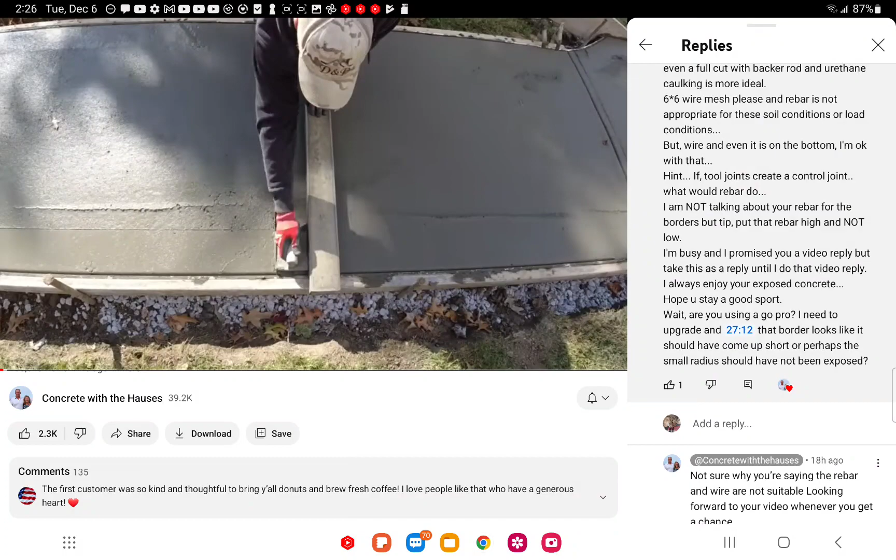Okay, guys, here's a guy out of up above Pittsburgh. We'll give a shout out to him. He says Concrete with the Hauses. All right, that's how he says his channel. He does some really nice stamped concrete borders; exposed concrete is what he really likes doing. I enjoy looking at his stamps and his work. I enjoy looking at the work.

All right, there's probably only one guy I probably don't enjoy much. The one out of up in Illinois or somewhere like that, with the big obese guy that just barely pulls up the wire and barely talks. That guy, that channel there, that work, I'd waste my time giving the advice I'm about to give to Concrete with the Hauses.

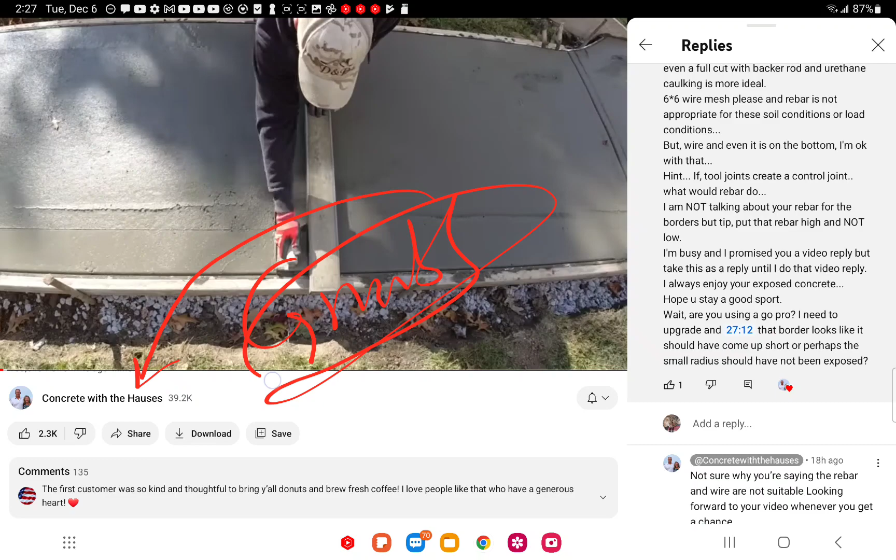Now this goes out to my man also out of Grub Mud. So Grub, this is you too. I said I would make something like this for you also. Well, I can do it for Hoss here also. Let's look at my comments and let's critique myself even. Okay, I wrote,

nice to see you using fiberglass. I saw him using fiberglass in this video. He scraped off some cream. I saw the fiberglass in it. He didn't say he was using it, I don't think. But I saw it. I would like to see those half-inch tool joints with perhaps a follow-up half-inch deep saw cut, meaning a total of 1 inch at least.

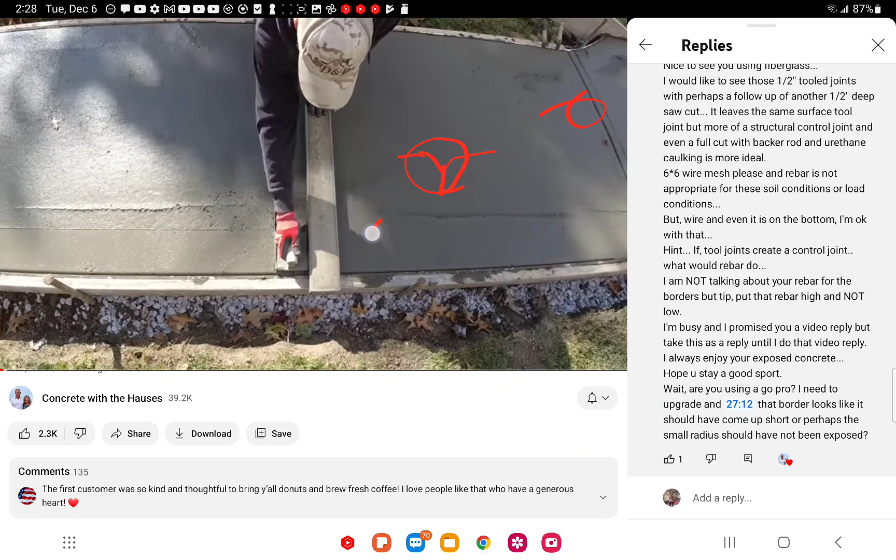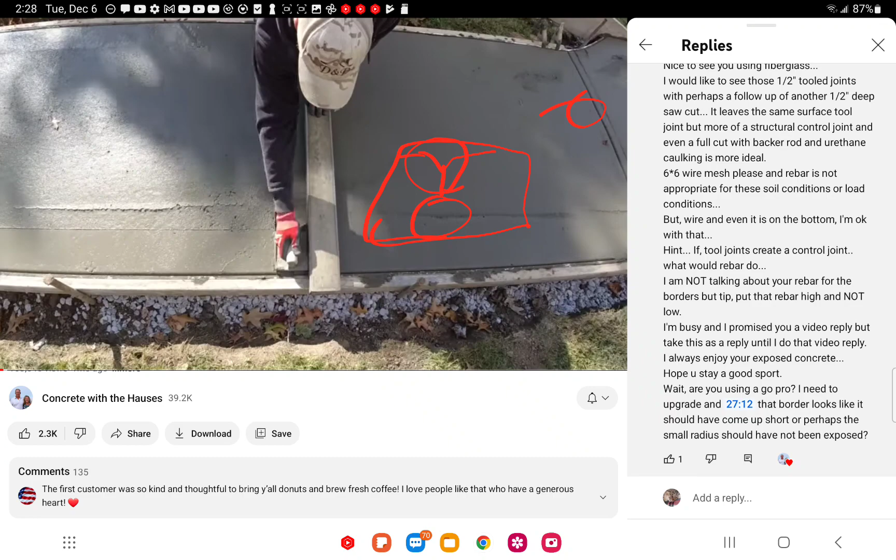So he's doing these joints. They look about a half-inch of profile. Okay. So after you set them, you come back and cut another half inch. And say you've got 3.5 inches here, which typically is not really 4. It's typically 3.5. That will leave dimensionally on the rest of the concrete. It's not as stable. More of the concrete over here, more stable than this dimensionally changed system there.

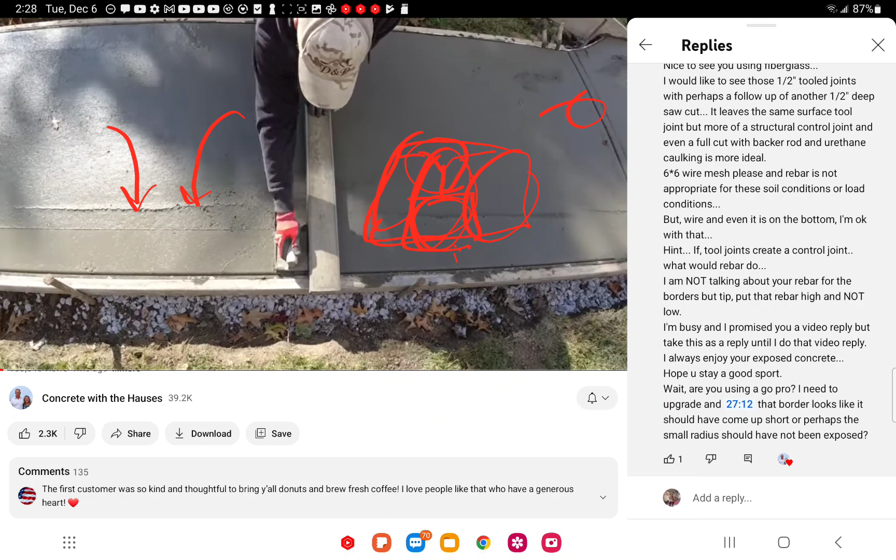That's more for loading. That's going to be for another video. It's not for expansion and contraction. A lot of people call it control joints, things like that. Not really. I'll explain that in future videos. And the short version is, you've still got butted concrete there. You have to put a full joint through, a full separation, for this to work. When I say full, you could argue back, well, I did 9/10. Yeah, well, you're right. That 1/10 really won't matter. All right, so it leaves some tooling.

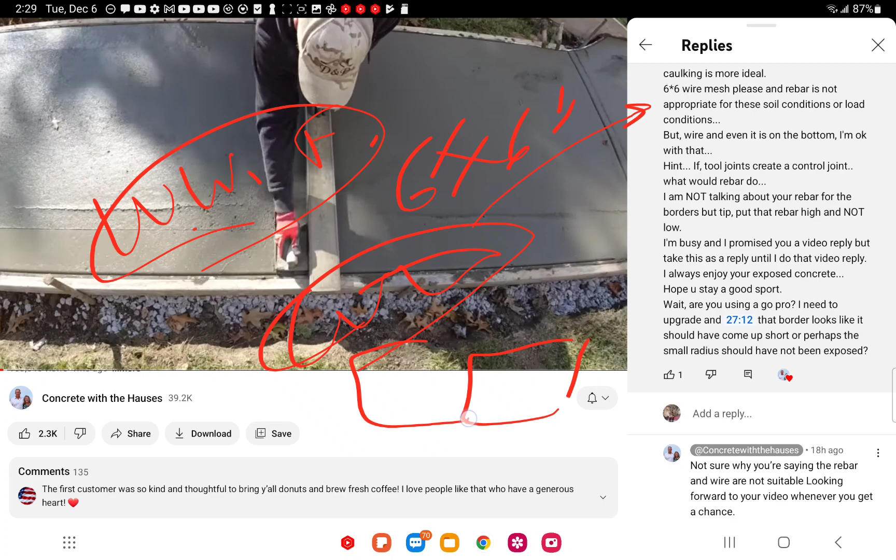Okay, let's look at my comments. Okay, so I state 6x6 wire mesh is what it's typically called. It's welded wire fabric, WWF. But typically contractors call it wire mesh. All right, 6x6 is one of the sizes, 6 inches by 6 inches. I'm going to show you that in a video in a moment, how awesome this product is.

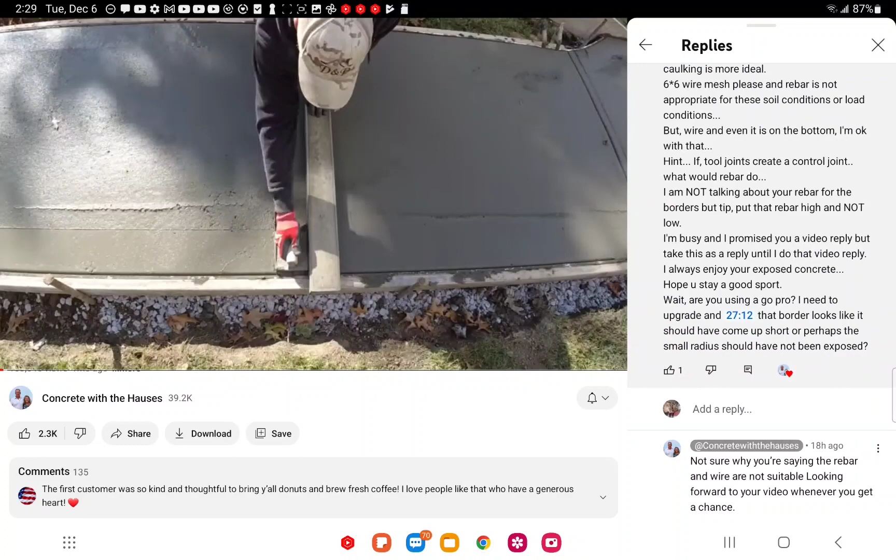Okay. Let's see. Hint: if tool joints create a control joint, what would rebar do? So in other words, if this tooling joint here creates a control joint, well, what happens when you have concrete here and you put rebar in it? What is that creating? It's an internal control joint also that you're creating with these voids, but you're filling the voids with steel. But then it needs bond strength, right?

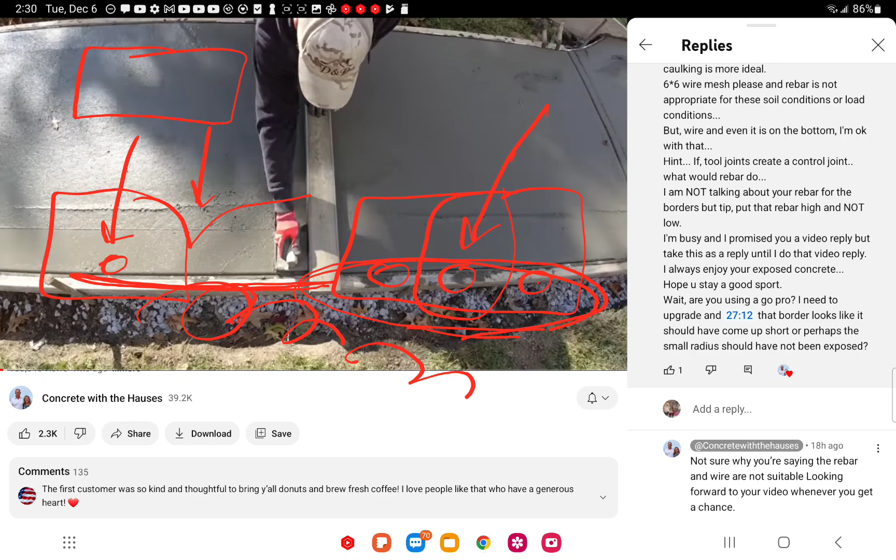So you're changing the behavior of the concrete, and the steel will not be one and the same. Concrete over here is one and the same. When you put the wire in it, it's going to be different behavior. And when you put rebar in, a different behavior. This is so small. These 3.5 inch pads, it's overkill using the reinforcement. And a lot of times I see contractors, and I think, Hoss, you might be one, put the reinforcement going this way.

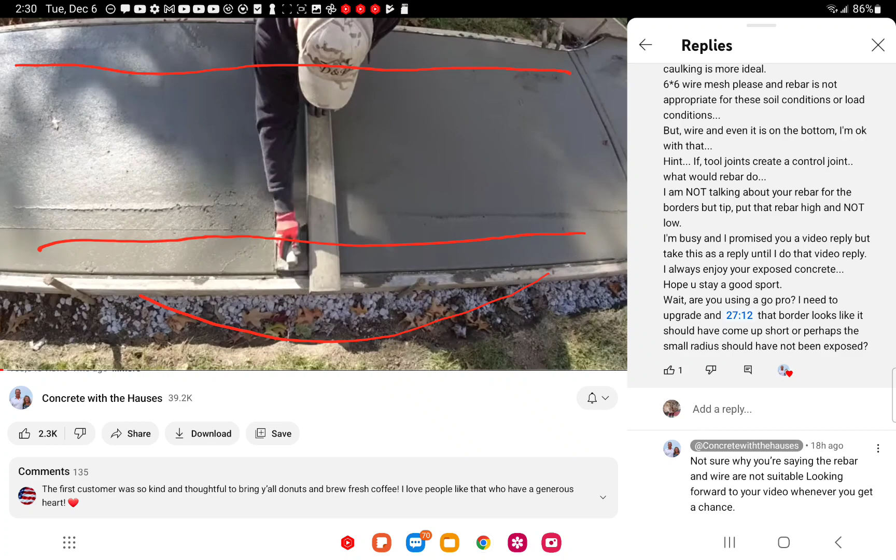So yeah, think of rebar. It's a longer reply video, and I don't want to go down that line, but think of it like a beam at that point. So you've just created a beam on the edge, but only with loading coming in this direction or this direction. You didn't do anything for the center here. It does not do anything of value.

Okay, so why? Okay, I'm busy. I promised you a video. I said that before to him, so now I'm getting to it. I always enjoy your exposed concrete. Hope you stay a good sport, meaning me doing these type of videos on my comments. Wait, are you using GoPro? That's what I want to know about that. I didn't answer it because it sounds really good. Not sure why you're saying the rebar and wire are not suitable.

Looking forward to your video whenever you get a chance.

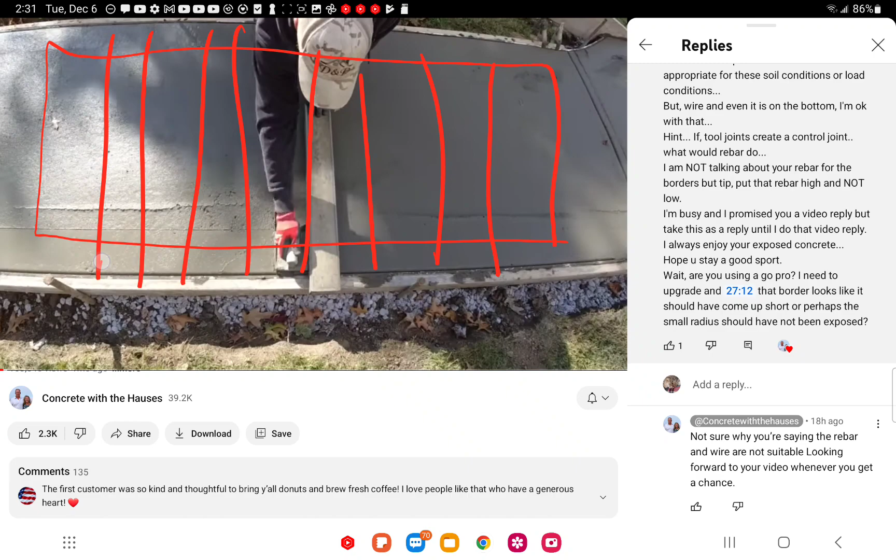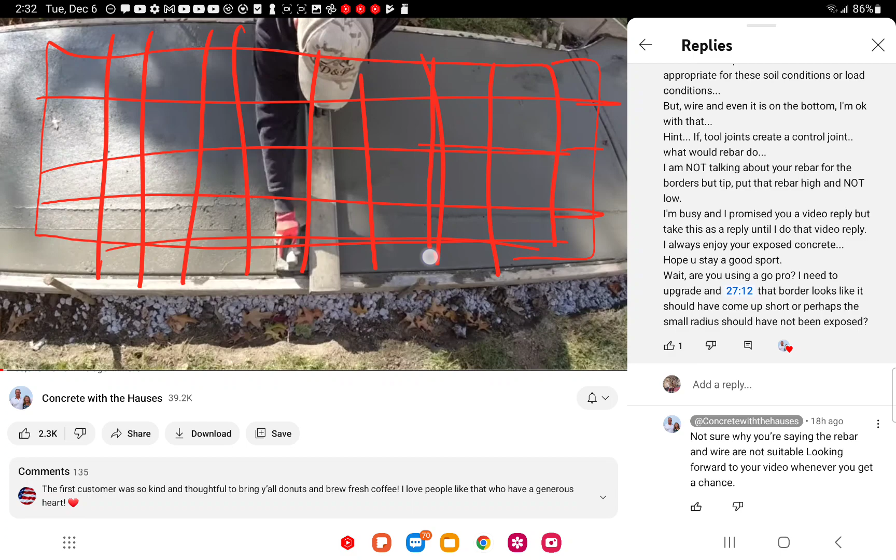So the rebar, just wire mesh. All right. So I want you to see this wire mesh. All right, Grub Mud, I want you to see this too. Okay. So I'm going to show you another video I made on this, but I want you to visualize that. Now this is working two directions. This is two-directional reinforcement for loading any direction.

I like Columbo moves. I like giving hints, but let's do this, and I'll go to that video too.

This is just a wall holding a slab sticking out. There's nothing here, this is just air. Okay, air. All right, and here's a reinforcement at the top. If I were to push down on this end here, load here, you can see it would elongate here. Okay. Now let's put the rebar at the bottom. Let's put the load here. You can see that this would break free here, and allow flexing to go down.

So Haas, when you're doing the borders, and frankly, where your cars are, your borders. Dropping something, sorry. You want to think of that loading, and Grub, this is what I was going to tell you, for you and for everyone. Put it top and bottom, but top or at the edge.

All right. So let's look at this profile. So let's look at the concrete, and this is the car here, wheels here, wheels here. Okay, so here's loading, and let's do the forces kind of like that. Okay, so your rebar is at the bottom, where everyone's putting it. And it's not helping right here where the loads want to fracture off, rotating this top edge off. But if you have rebar at the top, near the edge of the driveways, you don't have to put it inbound too much. You can step it. You can mat it that way.

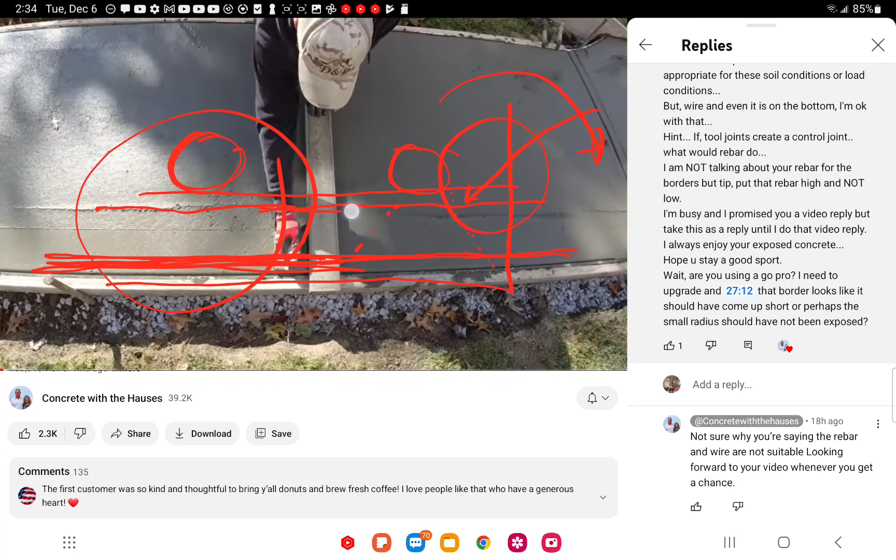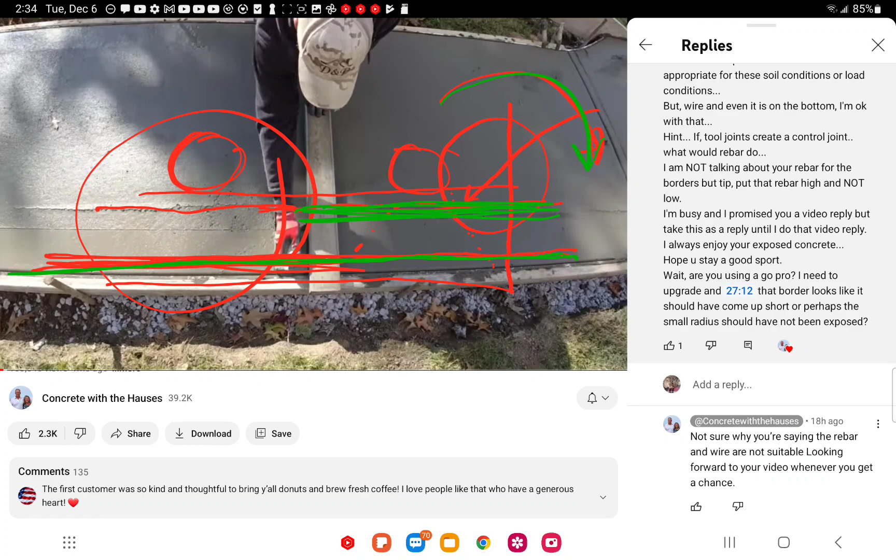But this is just for the edge, because in the middle where your car loads, like this tire, if it loads only in the middle, you want that rebar at the bottom. If it gets near the edge, I like to see you put rebar at the bottom and a mat near the top. All right, so let's change colors. So a mat near the top and the bottom continuous, but as you're edging, and this is the wire mesh, put the mat there, and I'll show you. But with your separation, your stresses, let me just clear this up for a second. Let's clear this, and let's do it again.

So here's your car, and we know cars driving on the edge, so the tire we're looking at that way instead of like this, right? Let's just do that then, so I don't trigger anybody. So they parked on the edge to let other people pull in. Well, you can see what happens when they parked on the edge of the driveway is that this wants to fracture off like that. And your rebar down here is not helping. But rebar at the top would take in that tension of this wanting to drive down. So that's why at the edge there. But at the middle of the driveway, all bottom rebar is perfectly well, and then that's your edge.

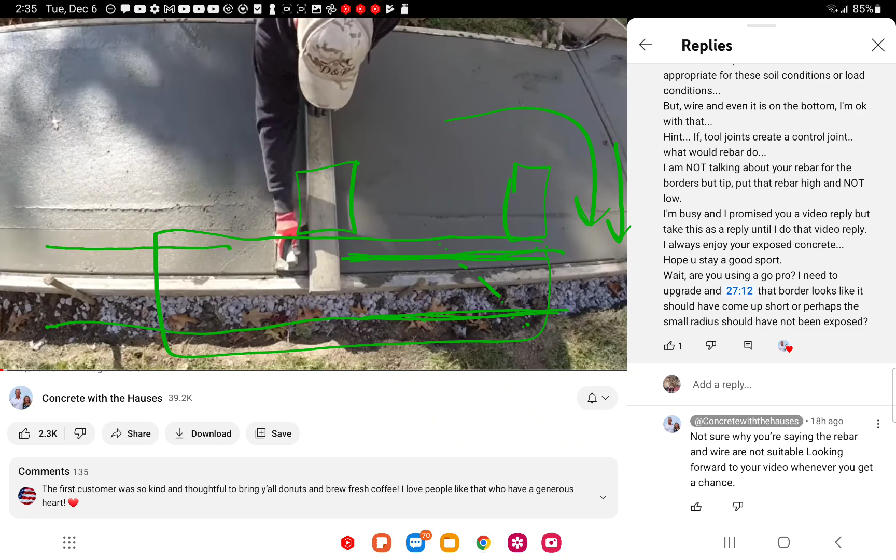So Haas does borders, beautiful borders. So I'm going to compliment him on that. So he does these borders, but frequently Haas does the border secondary because he'll do exposed. Maybe he did in this one, I don't recall. But here's his main driveway. He'll do that, and maybe this will be exposed, and maybe this will be added later. These two greens are added. And I've seen you put your concrete down here.

I feel like I'm talking to Haas from the Cowboy Show.

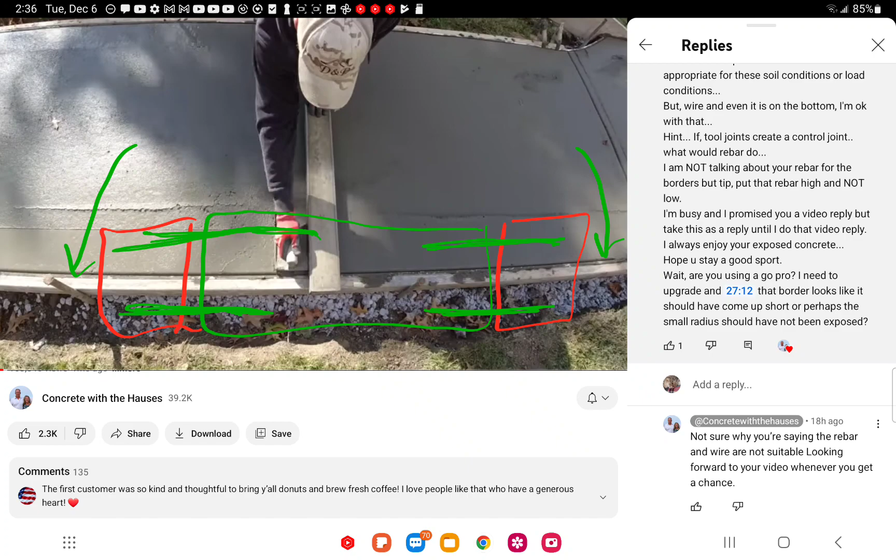All right, Hoss, you can see that your rotation, if they drive on top of that edge, is loading down. It's just going to break free. But put your rebar at top and bottom. Here's your top. Now tie it back here. Pretty good, your wire mesh. Or if you want to dowel it, but I'd rather see that wire mesh sticking out.

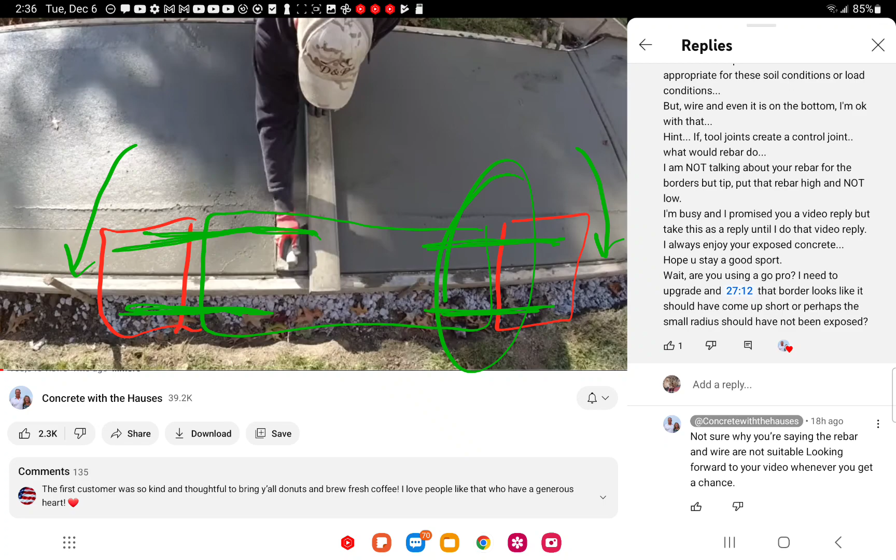And now this will bond. Now let's prove that proof of concept. I'm going to show you this fully broken in one of my videos I've done, and then we're going to show you how badass wire mesh is. Welded wire fabric, wire mesh, however you like.

So be a good sport, Hoss, and Grub, you are already a good sport. So Grub, you gonna grub mud. You follow Hoss, Hoss follow Grub, and help him out if you can. Hoss, he's doing it. He needs a little hand. Give him a little pat on the back.

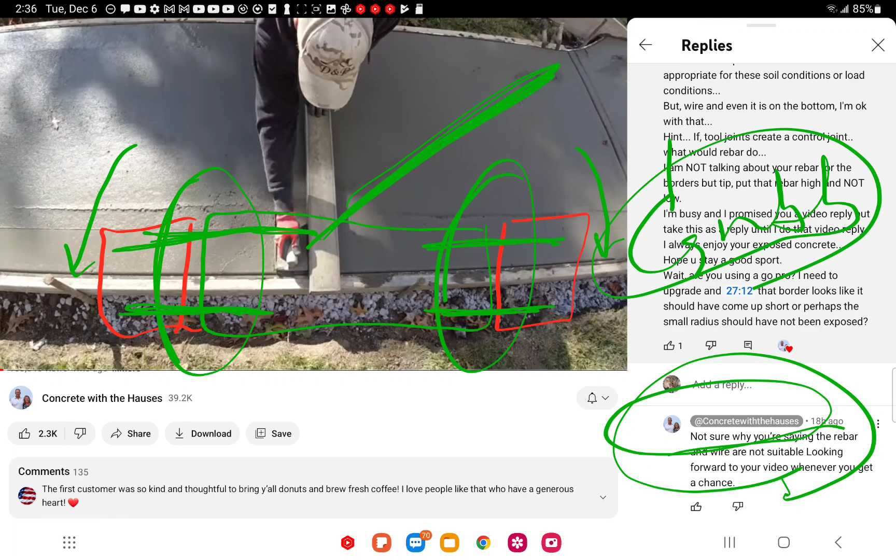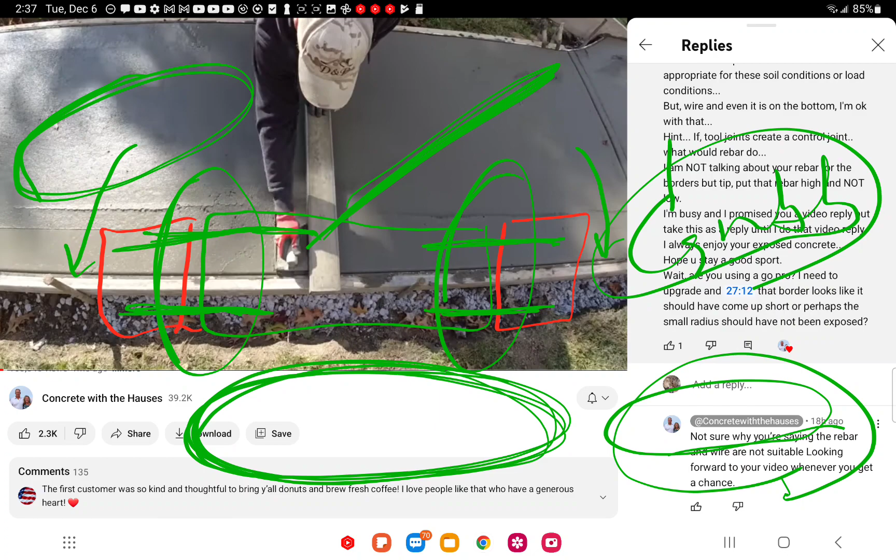All right, there shouldn't be any hate here with competition. I like photography. In photography, there's nothing but jealousy. There's just one jealous person after another. There's no pats on the back. And in engineering, there's usually no pat on the back. They're usually trying to find defects. In contracting, there's often pats on the back. Man, you did an excellent job. That's badass. Awesome, awesome. Well, let's keep it that way. All right, let's keep it that way.

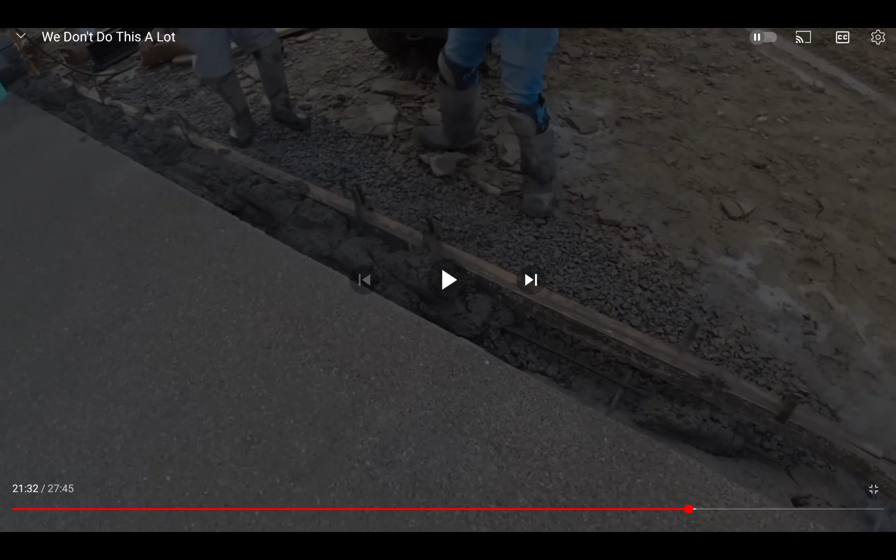Let me show you guys some of Hoss's work here. Let me see if I can speed it up a little bit. All right, steps, driveway. I'm not going to nitpick on anything like that. Border. That's good. Okay, Hoss, so let me blow this out here. And there's your border and your reinforcement. This is Hoss's reinforcement here.

And that one bar there helps in the deflection loading, depending where it is, high or low. If it's in the neutral axis, you basically did nothing. So if you do it in the middle, you don't really change your strength. It's somewhere probably about there, just a touch below it. So say this was 6 inches, you've got it down to maybe 4 now by doing that.

Now the car will drive up here, and that will help with that deflection and that capacity. It's bending, but in this capacity, it just wants to fall over, as I'll show you in a moment. Get it? It's a moment. He's going to tool that joint. It's a full joint all the way through. The rebar, the doweling, is going to help hold this together.

Don't think of the dowels, and I did a video and I didn't post it. I want you to grab 2 pens. I want this to be a pen here and a pen here. And you butt those 2 pens together. When you butt them together, now put a load here, and you see what happens. They just pull right apart, right?

Now I want you to overlap your pens a little bit, and you'll see a little bit better. And then overlap it a little bit more, and then a little bit more, till you realize, oh, you know what? If I overlap it by, say, half a pen, I really get some transfer from here to here. This becomes acting as one. And that's what you're looking for there.

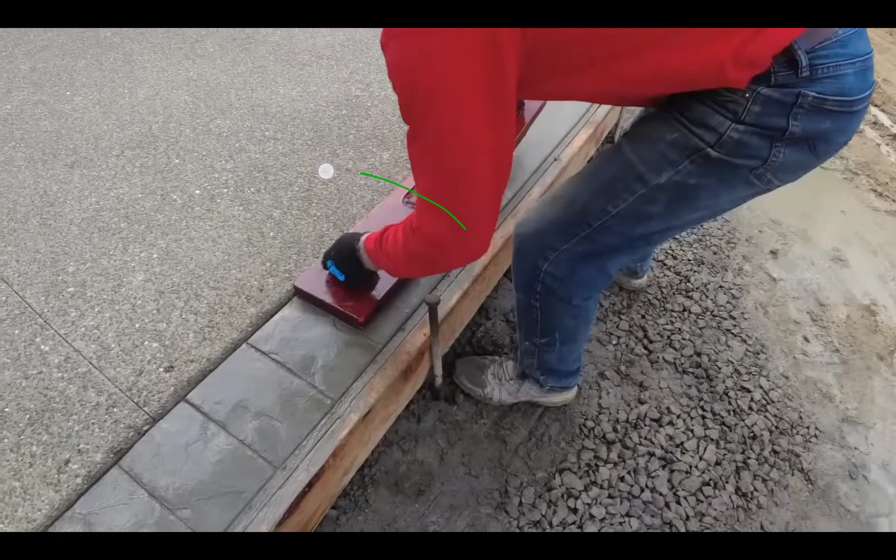All right, so let's look how pretty this might be when Hoss is done with it. He did a stamp. Yeah, see that? Roll stamp. Now, this is a cut joint, which I really like. Saw cut. That's nice. It'll look like a mess if you don't seal this. He is in a climate, Pittsburgh, where Sikaflex would be nice in there to seal it. You don't want water getting under the pad.

Yeah, it can come through the sides there a little bit, but so be it. So we wanted the border a little bit longer than my stamps. Okay, so you can see the beautiful exposed concrete there. He likes using a release and then spraying it off. Yes, you'll see it on the garage doors, but I'm sure he comes back and removes it off the garage doors. So yeah, we can pick at each other's work or people's work all day long.

He's doing it. Let's go.

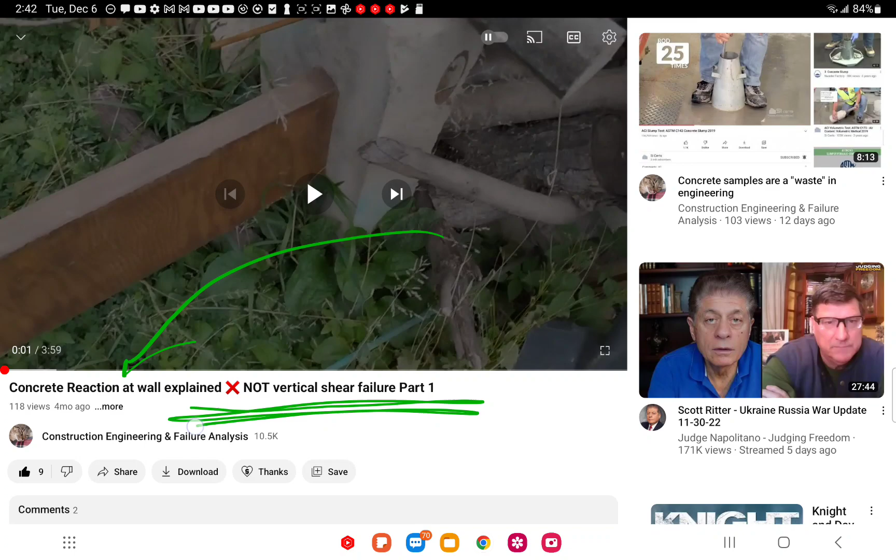So when it comes to my video here, the title is concrete reaction at wall explained. Not vertical shear failure. Okay, so vertical shear just means that imagine if you can just load something literally just vertically without putting a reaction, a torque on it.

And the torque, if you press down on this piece of wood I have here, if you press on this end, it would create a pushing effect against the wall and a pulling effect at the top there. Imagine with nothing holding it on there, what would happen if you could brace it. Now, if you could just push it straight down, you would just be shearing, the pure shear, just straight down. I'm going to go over that in this little video here, and then we'll help explain that.

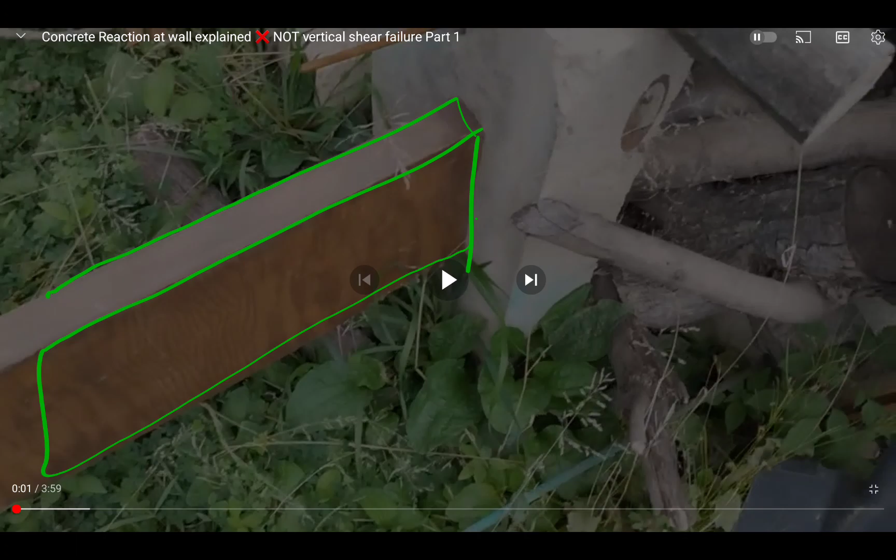Haas and also Grubb, and anyone else, contractors, concrete guys, I want you to think of this as what we saw Haas do, the extra slab, the extra piece near the edge. Or I could care less. Think of it as your driveway, and this is where the car's tires load also. So I want you to think of this outside edge as an independent reaction from your field, your center part of your driveway. Let's look at the driveway, all right?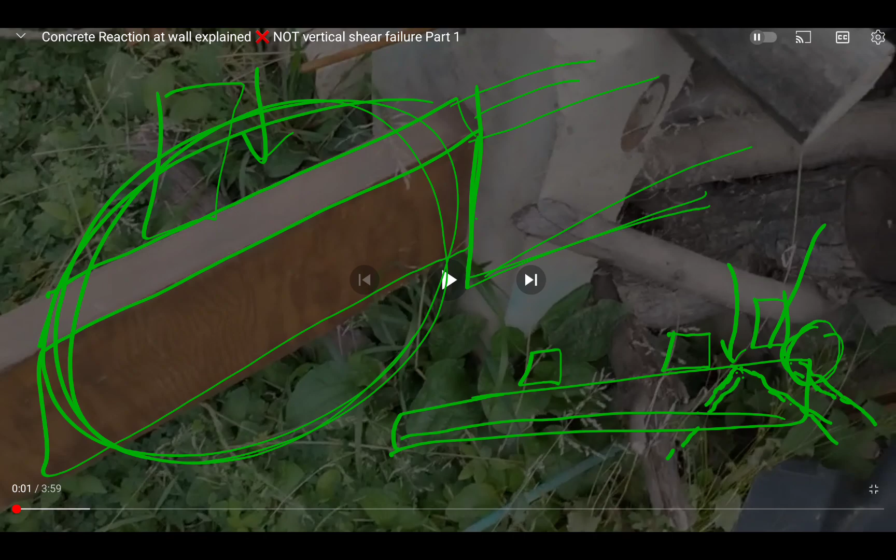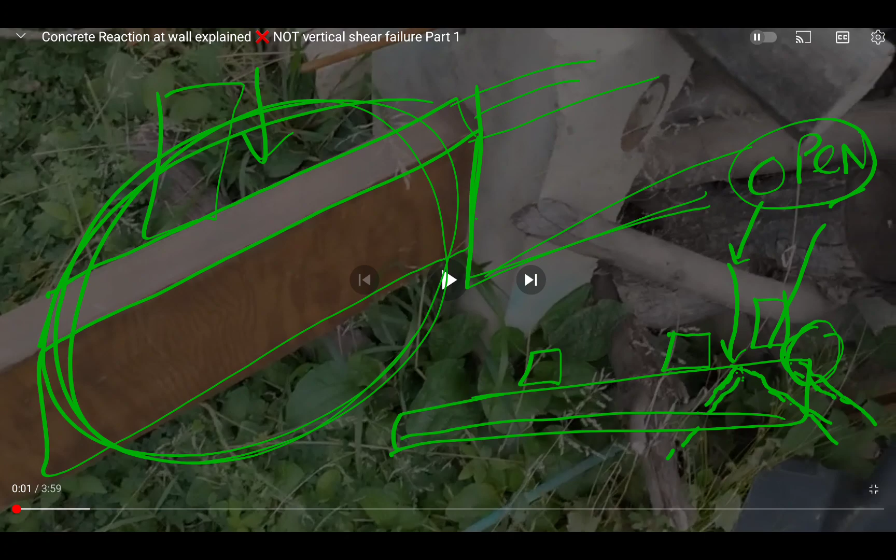You'll be able to affirm this if it's the crack. If you look at it, look down from the top, and it appears to be open, not compressed. If it is compressed, then what you have now is your middle pad, your center of your pad, is sinking. This pad is sinking, it's sagging, and the reaction is resolving itself.

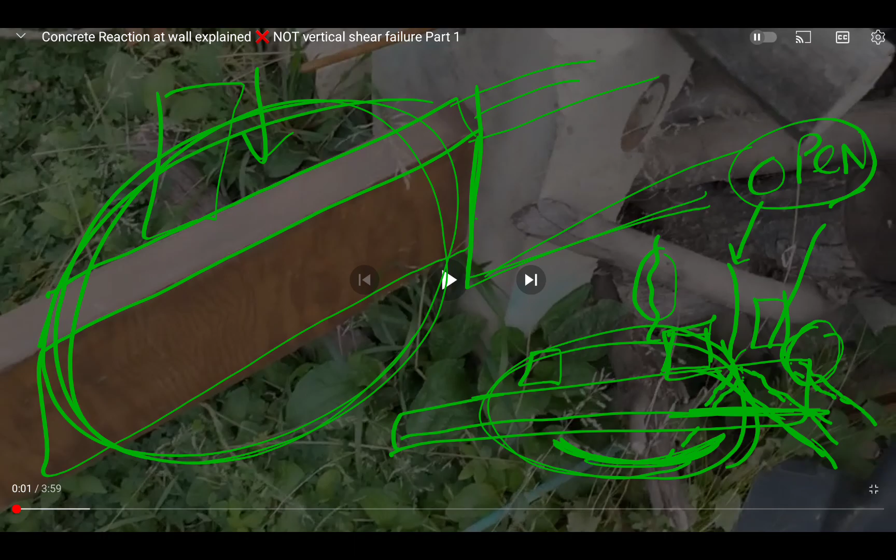Well, it will probably be a fracture at the bottom if you have rebar. And thinking of the load, wherever your tires are, you'll have that fracture there. And you'll see it compressed because in that crack, you'll see spalled concrete out of the crack. It'll be like it's chipped off. And that's because of the compression effect of it and the pad bending, if you will.

Now let's let this clown play. That's me. And let me explain to you one more time. So I put a piece of rebar through here. I want you, Grubb and Hoss, and all the other contractors, concrete guys, to think of this as the rebar at the top. I'm going to spin this board around, then you'll see the rebar at the bottom, and you'll see the difference. This is some material wood that I took apart for you guys.

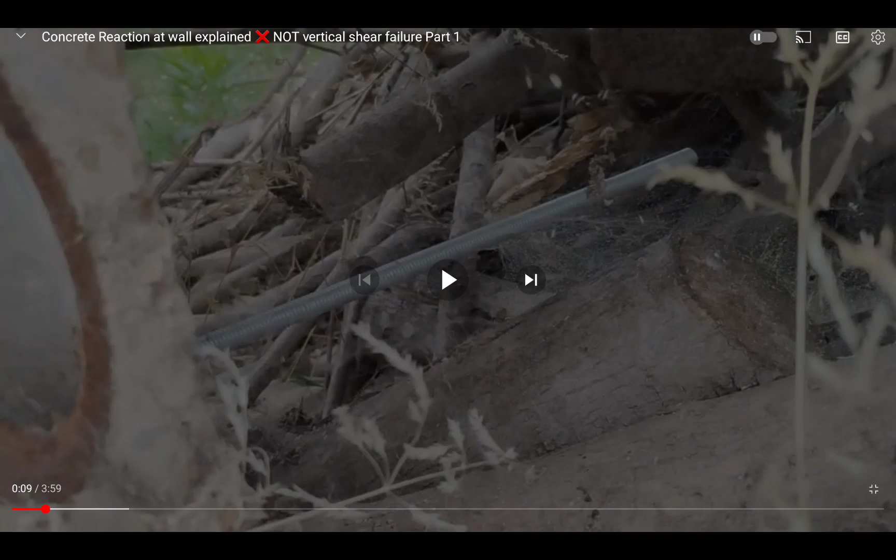There's a rod. On the backside, you see that's how I anchored it through to secure it. There's all thread going all the way through. It's bolted right about there somewhere. It goes through. Not bolted enough where I can't rotate it, not that taut. And it's acting as top rebar reinforcement. I'm going to spin this sideways to show you there's nothing else there besides that.

Now imagine top bar. Now imagine how thin if you had your concrete like that in the middle. The rebar's in the middle now. Watch how easy this flexes. And I'm also going to show you how this deflects. Nothing, right? Nothing. When it's narrow, when it's thin like that. See? Like a springy board. Right now, let's go ahead and turn it, spin it. And now it's like a deck.

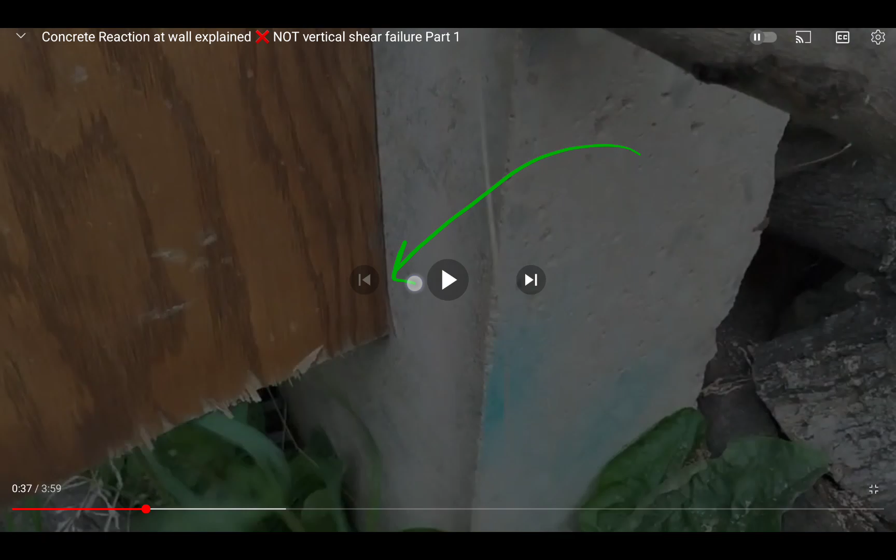All right. So once you think of this as now, even though there's no rebar at the bottom, you can imagine now when you push down that end, it has to push against this end. The force multiplier effect of that rebar at the top and the redirect. And let's go ahead and consider this a 9.5 inch concrete deck, if you like. Okay, so now look what happens when I lift up on this end down here.

Of course it would, right? It would lift up. So that would be a bending moment I talked to you about if you had a sagging deck, a sagging pad that wasn't compressed, that you didn't compact the soil tight enough to make the beam, if you will, act as one. I want you to think the floor is a beam, especially that edge over there, Hoss. Think of it as a beam, and you want it to not dive down, to not dip. So make that soil around there tight.

At the bottom. But what happens when I put a load here, though? Called sagging here, if you will. What's going to happen down that end? It's going to brace itself down there. It's going to put this top steel in tension, and brace itself at the end. So that's pretty darn nice, isn't it? It's simple as that, guys.

And so much so it'll move this. Now this gets kind of sloppy. Could get a little tighter. But it's now pushing. I mean, it's really pulling on this and pushing back on the wall. Top rebar, okay? Put this top wire there, pushing back on the wall as I load it down here.

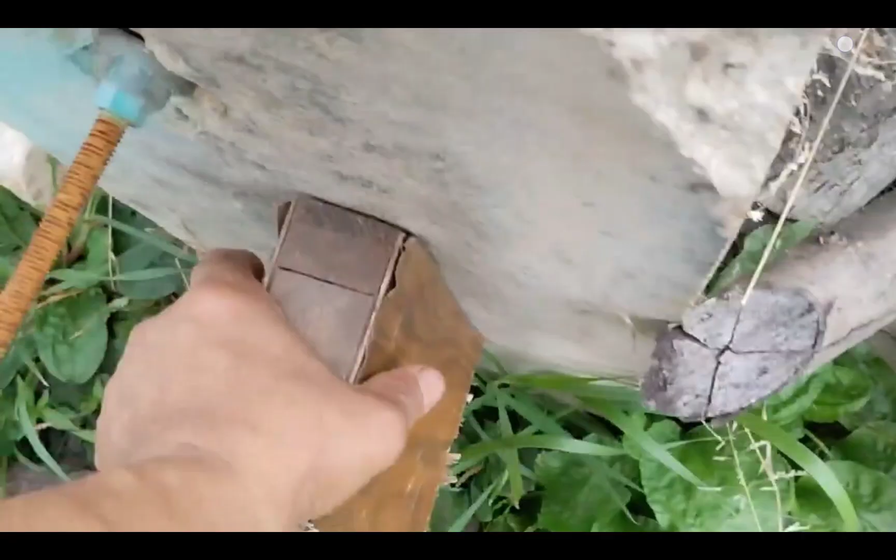Now I'm gonna jump to let's come up here and just create an elevator drop, a shear action just going straight down. As if no deflection would happen out here. It just happens to want to go straight down. Is it even possible? Well, look how loose it is. If I can grab it, lift up, and then push down.

Push down. Well, I'm at the bar. The bar is right about here somewhere. So if I keep pushing down, it's going to splinter this off, right? It's going to spall it off. If I push down here, it's just putting this steel, as you can see, down on this side. It's rotating out. Can't rotate out because at the back end, that rotation loops like that, right? And that means coming back and pushing against the...

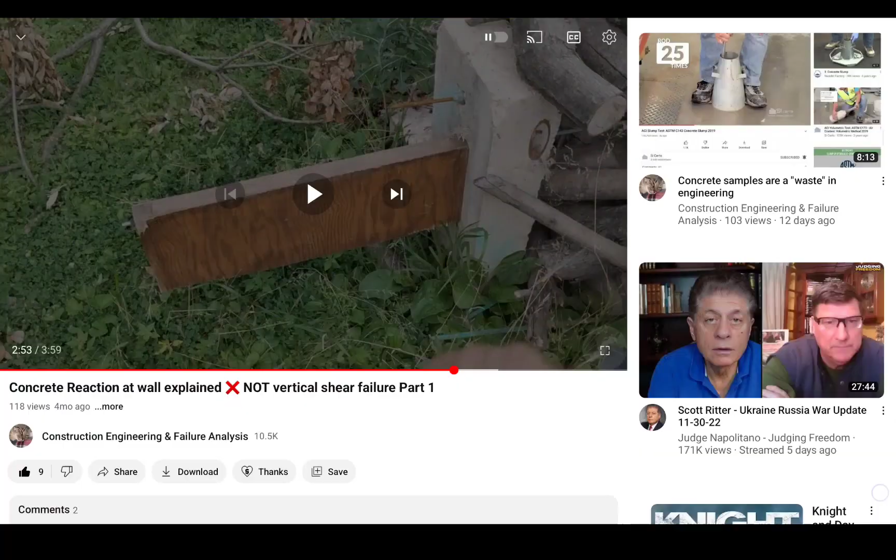You know what? You have the title of this video. Let me give it to you again. That's what the title is called. This one right here, this title. You can find it. Now I have one more video to tie this to, and then you'll understand why wire is so beautiful.

So this is another one of my videos you can come to called Concrete Repairs: Placement of Rebar in Concrete. Does it matter about rebar at bottom of a pad, all right? Rebar is reinforcement. I don't mean the rods, all right? I'm just talking about reinforcement. So that's that title.

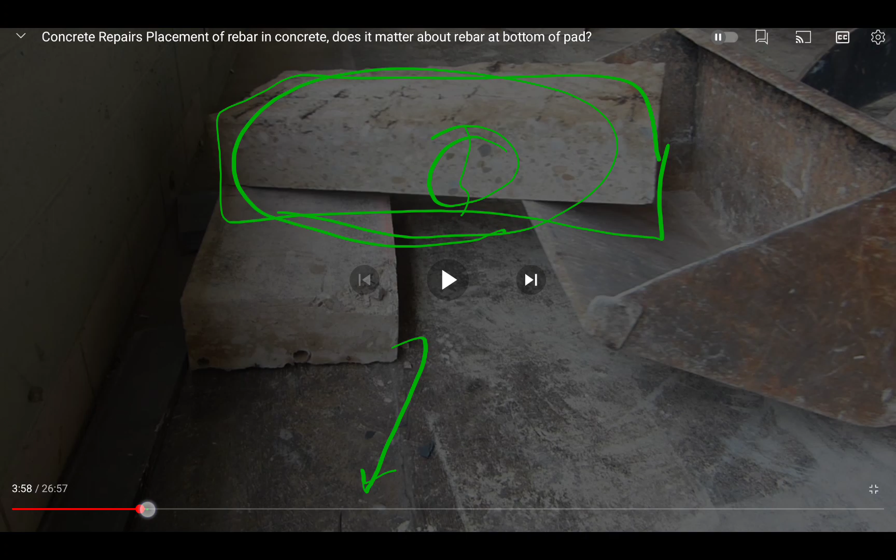Okay, so in that video, I take this slab. I first show you a crack. It's about 13 minutes long before you get to the next stage of the video. But it's just showing you how cracks develop, all right? So you can come here and torture yourself for 13 minutes, or let me just scrub here for you. So that was the rotational side. And I'll show you exactly where the fracture is. It's exactly predictable. That's where the cracks are.

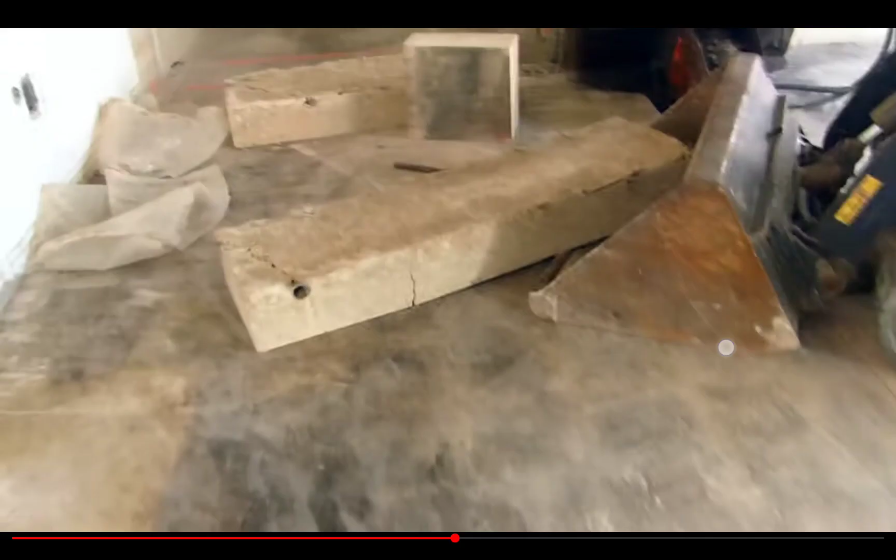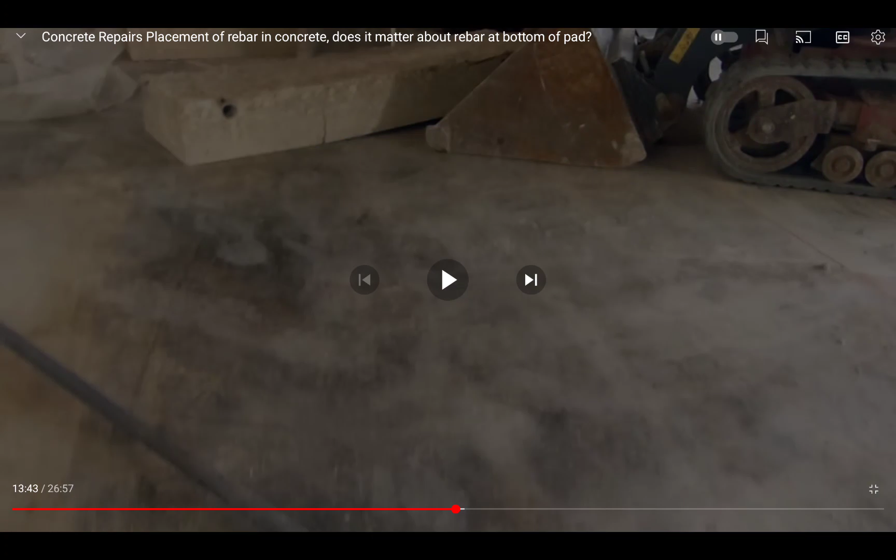Now here I grab another piece of slab that I'm able to get a fracture out of. And I use a machine to lift up the slab, and I drop it until I fracture it fully. This is worthy of your time, both you and any contractor. Watch it again, on why you don't have to get so crazy about your rebar that might be on the bottom. I'm not saying do that. Bring it up. Give it some cover to protect it. But I'm saying the engagement is what matters. And I'll show you. Wait a minute. I guess I should back this up.

Right there. So there is the reinforcement. It is on the bottom. You guys can see this is exposed. It's bottom. This is over 40 years old, this piece. It's a commercial job it came out of. They did not care that it was on the bottom, all right? Or maybe they did, and then they walked on it and it went to the bottom.

Because frankly, I see people lift rebar up all the time, then workers step on the concrete. You know that you're not floating on top of concrete. I hope you know that, guys. You're just pushing that rebar back to the bottom. If it's not on chairs, you're just pushing. If you don't feel like you're walking on springy rebar, you just push the rebar down to the bottom.

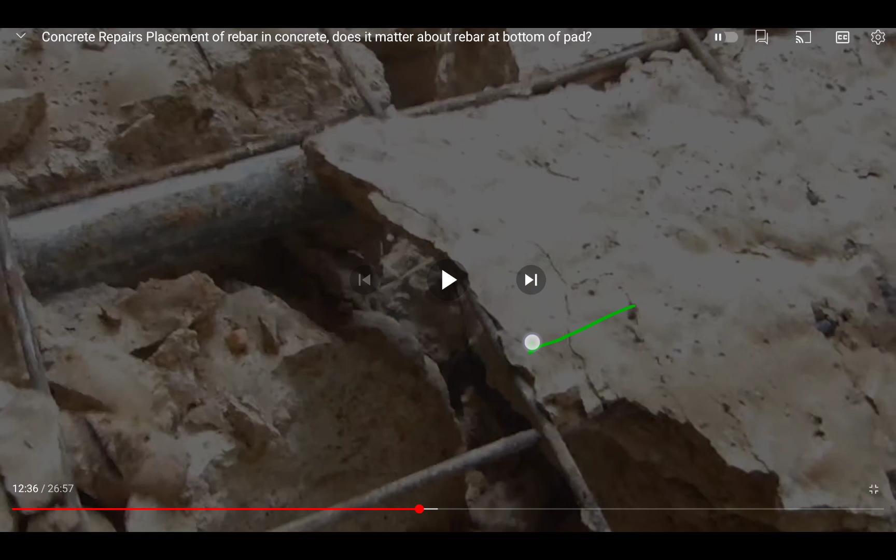So let's get over the stone. The stone has more tension, was able to resist this. There's another section. Let's back it up just a hair. So you can see it's very little cover. Very little cover. The rebar is really in great condition. The reinforcement, the wire mesh, welded wire fabric. Nothing there. But that rebar, let's call it the rebar, the pipe.

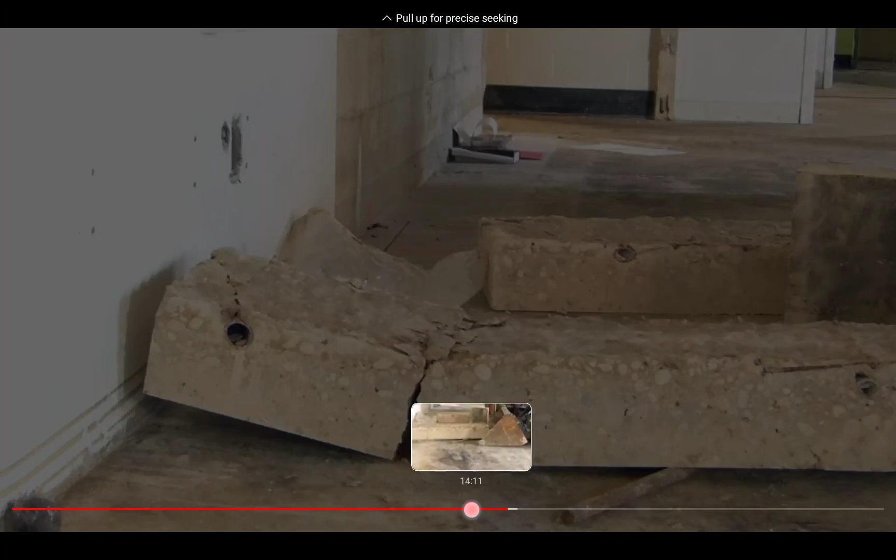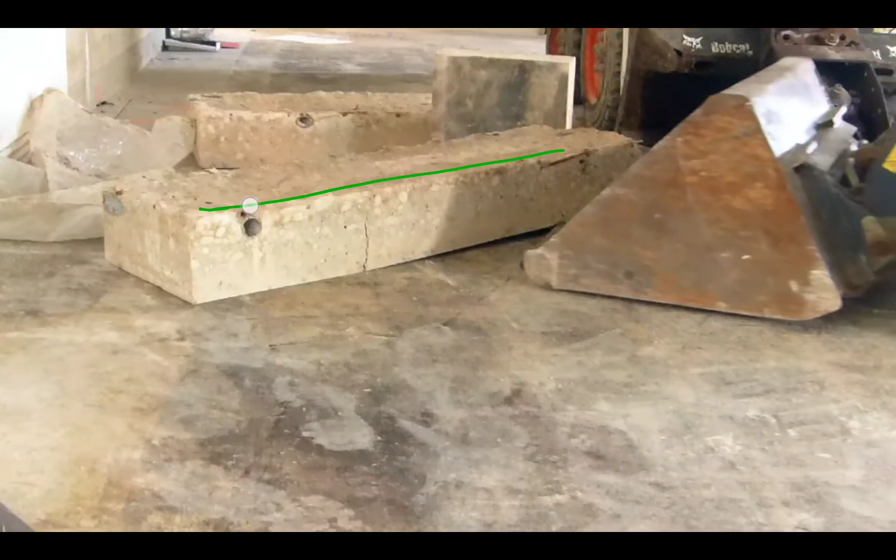So I'm going to turn that down, and I'm going to narrate over it. So there's the fracture. I'm going to lift this up, and there's wire back there. There's wire here, but there's no wire over here. So I just turned the slab upside down. So this will be the finished part, and that's the bottom section we're looking at. And I just lift it up until I bring it to failure, where it just bends over like it's nothing. Where I flex it.

Okay, so I'm going to have this flexing in two directions, obviously. This direction and here. And this will be fully open. There we go. Come on. You see it fracturing. And here comes me jumping on it, I believe. So you can come back and watch the video if you want to hear me talk.

There's no bottom reinforcement this time, but that's the top part. All right, so it's totally shot, right? What can you do with this? You can just throw this in the trash now, right? It's junk. All right, that's what you think it is. Let's fast forward.

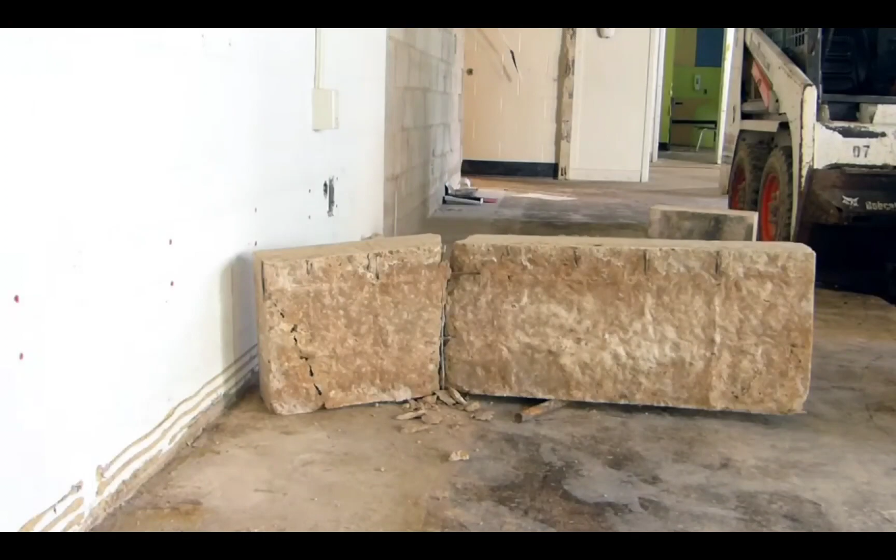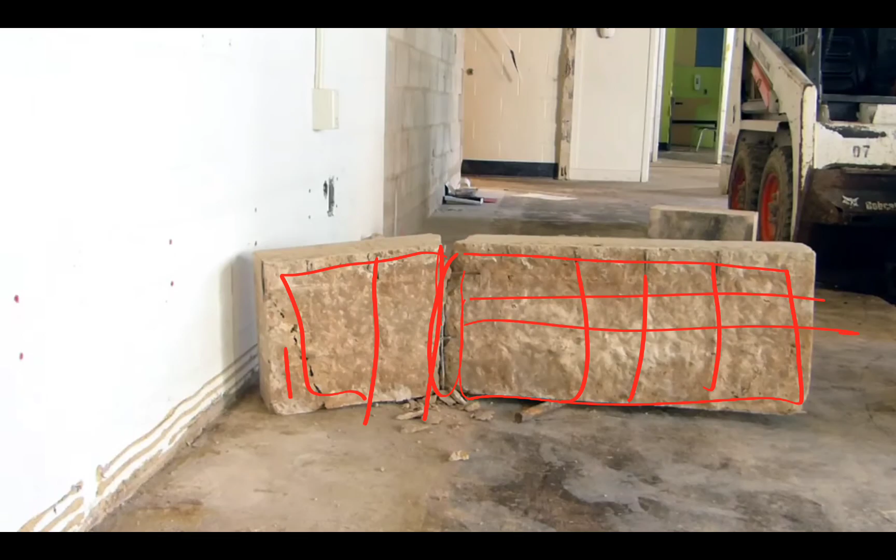And there it is here, just totally broken apart. You can see it's just two sections. There's the raggedy rebar, if you will. You can see the mapping of the reinforcement, the wire mesh. And it's just totally open, right? Totally junk. And I just throw it back down. Oh, there it is. So this is what it looks like now. It's just fully broken through. There's just wire on the bottom. That's the top surface we're looking at now.

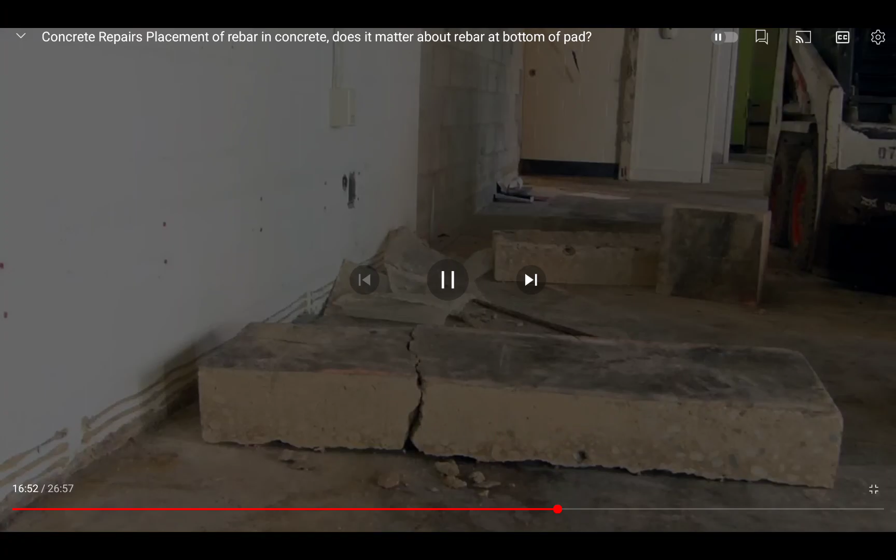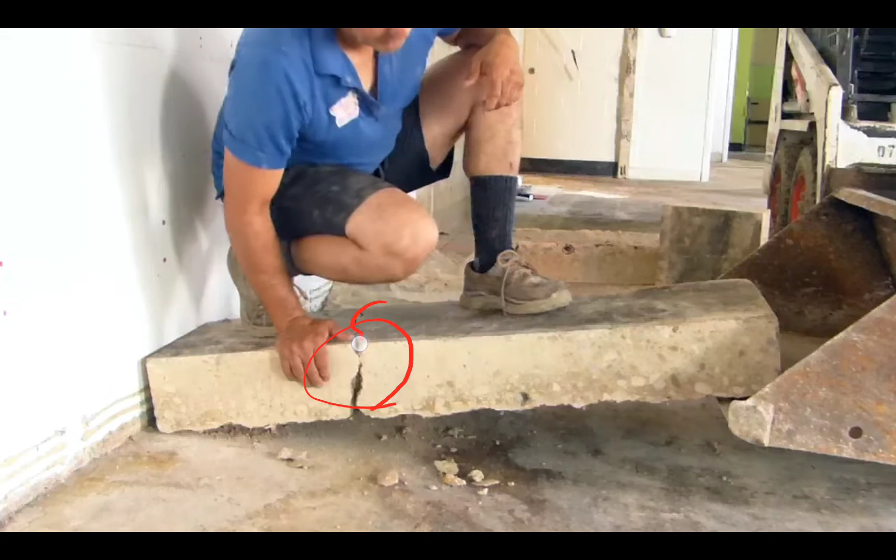I'll bring the machine over. I lift it up, and I stand on it. I talked to you about the reinforcement. What I don't talk to you about in this video is what's needed. This needs to be epoxied in, but I didn't want to get too deep for you guys on that. It needs to be epoxied in if you're coming across this problem. Grouted in, epoxy preferable. A little more in depth, but now let's go ahead and show you

this right there. So, cue up. There we go. You can see it's totally down to just the wire. Get it? It's down to the wire. Right here and here. That's it. There's your concrete fully separated. So what can you do with it, right? Watch. It's just down to one piece there, two pieces. Now I'm going to fast forward it.

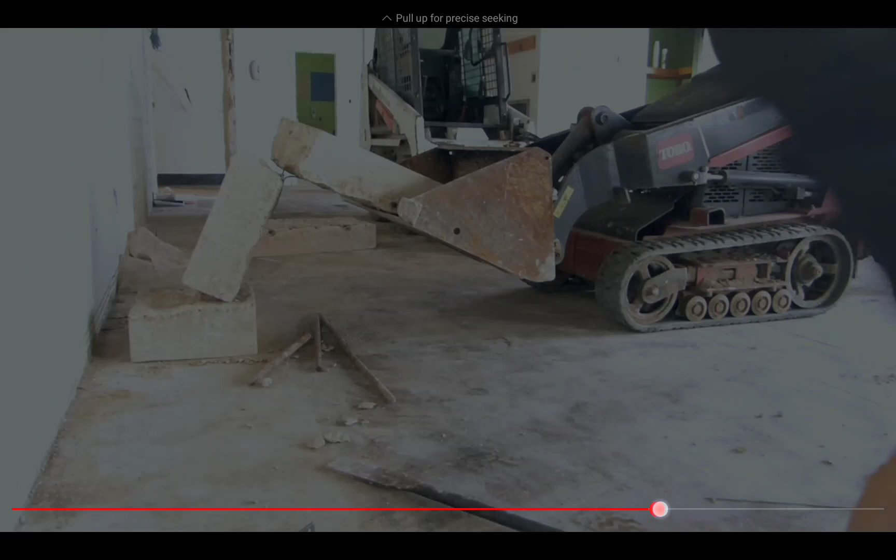So I'm going to put it on top of this guy here. It's elevated. I'm going to drop it down. Wait a minute. I got to fix that real quickly. Again, there we go. So no magic act.

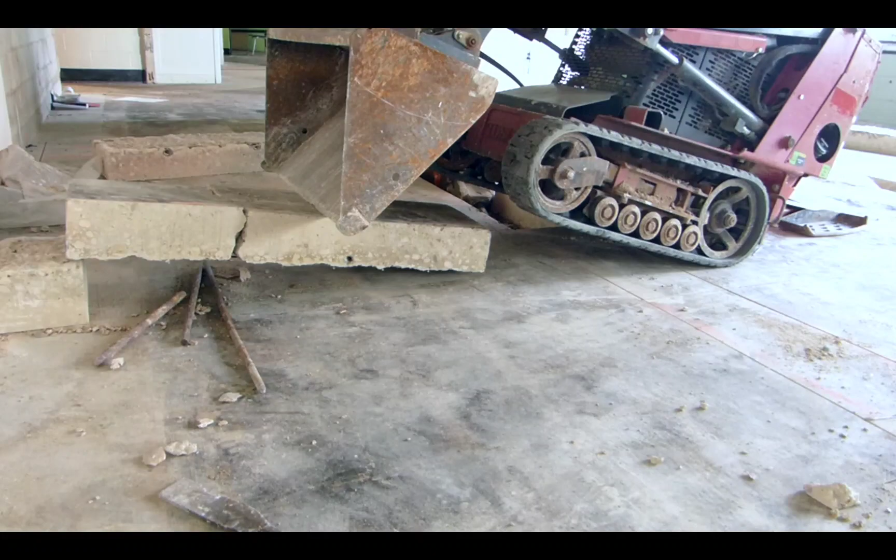You see the machine is only on its heels. And the other contact point is here. And this is flat. And yet, these are two pieces of concrete, aren't they? Two pieces. It's the bottom reinforcement that's holding this together.

It's on the bottom. Now, also, I'll tell you in this one then, imagine this was V-shaped. Well, this would just fold over. So the stresses are inside where this concrete is butting now. The stresses are there. There is no ifs, ands, or buts about it. The metal can't stretch, so this puts this in compression around about that V shape.

Now I'm going to load it right there at the seam. I'm going to lift the machine up there. There we go. Now it's got good clearance. You can see its clearance under there. It's back on its heel, and the next point is here. As I talked about, you have to put a scale on it to figure out what's going on. If we had a scale, we'd be able to tell you how much it's not touching. We saw that a second ago.

Across the blade, but I could point load this even more if I had a. And there we go. Oh. Well, that was interesting. It jumped me to a new video.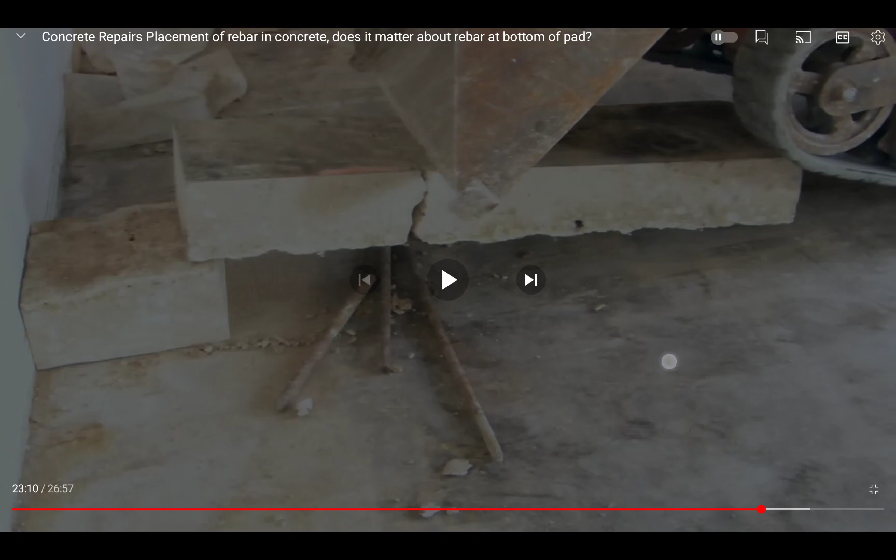If I were to put soil here, let's say this is all soil, right? And we start getting erosion here, because it's by the edge of the sidewalk. Here's the soil out here, all right? And it starts eroding, undermining our pad. It's going to happen as they hit this section here with their vehicle.

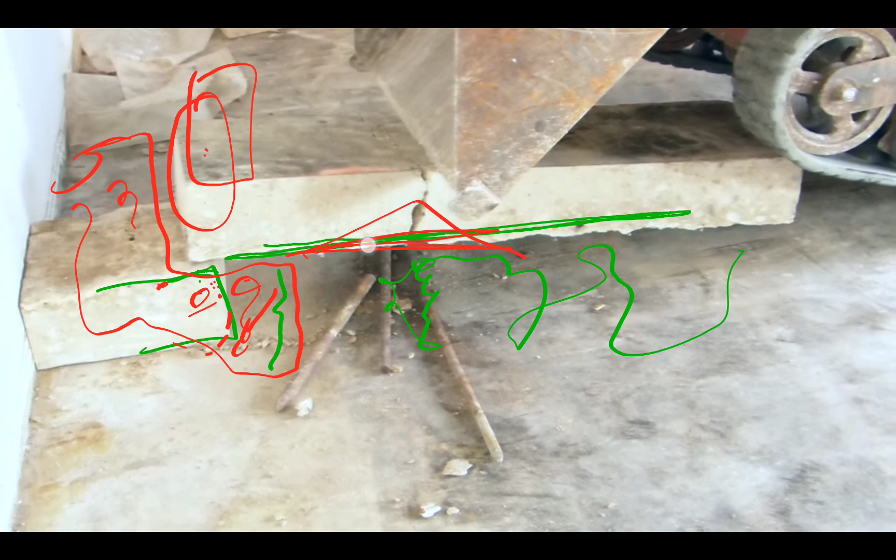It's going to create a bending moment here, so it's going to be reversed because you're not getting any strength down there from the bottom of this. The bottom rebar is not helping you. But if you were to put top rebar there, top reinforcement and wire mesh, I'm happy with. So bottom reinforcement also, and top mesh. And then bottom all the way across, and then top mesh near your edges.

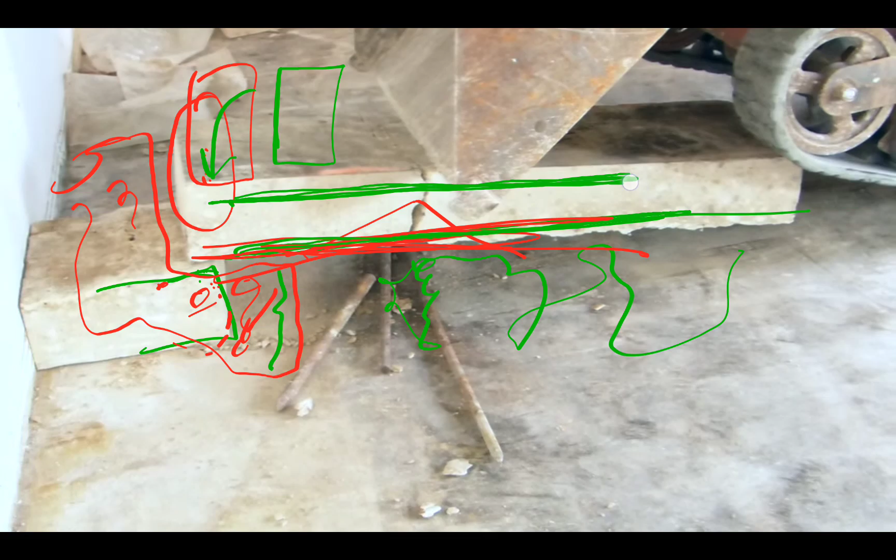Now you're going to cover it when they load here with their tires. It's now going to try to flex this section of slab over, but the reinforcement will grab it from the top. If you try to grab it from the bottom, you're going to go nowhere. You're going to get this.

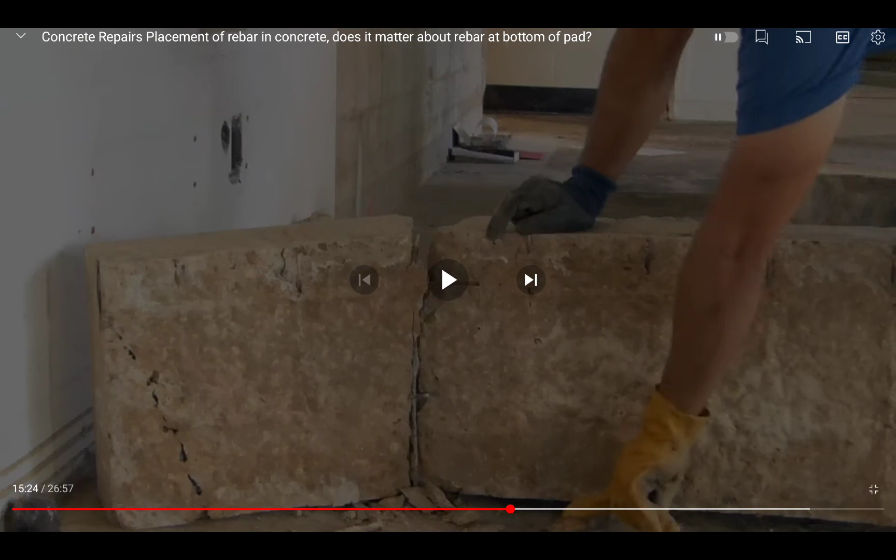Remember, I flipped this over. You'd have to invert that in your brain. So hold on. Let's see if I can do better than that. I'm looking at the thumbnails. Yeah, I can't do better than that.

So you can imagine, though, if this was supported under soil and this whole edge was not, even though bottom reinforcement's there, if this stays supported, this will just flap down. But when you reverse it and put it up there, now it's supported. It's pulling back on the counterweight, the counter anchorage of the pad.

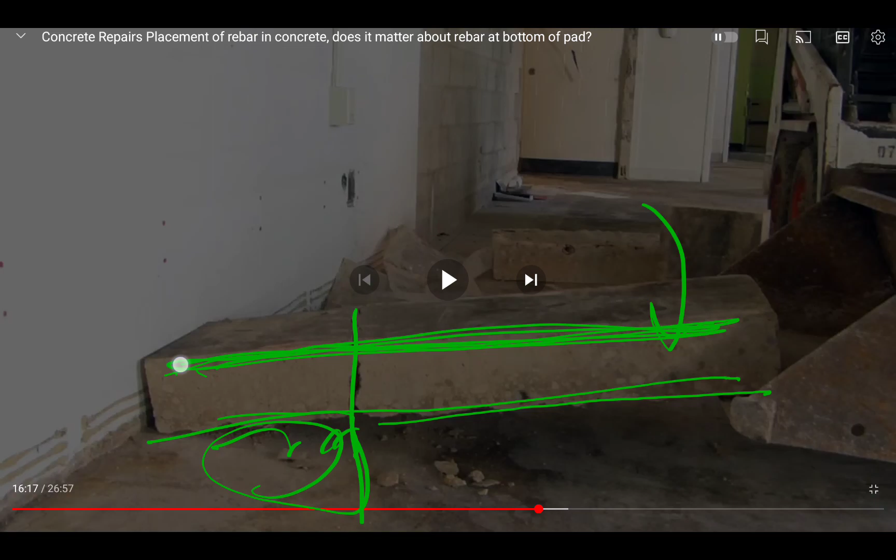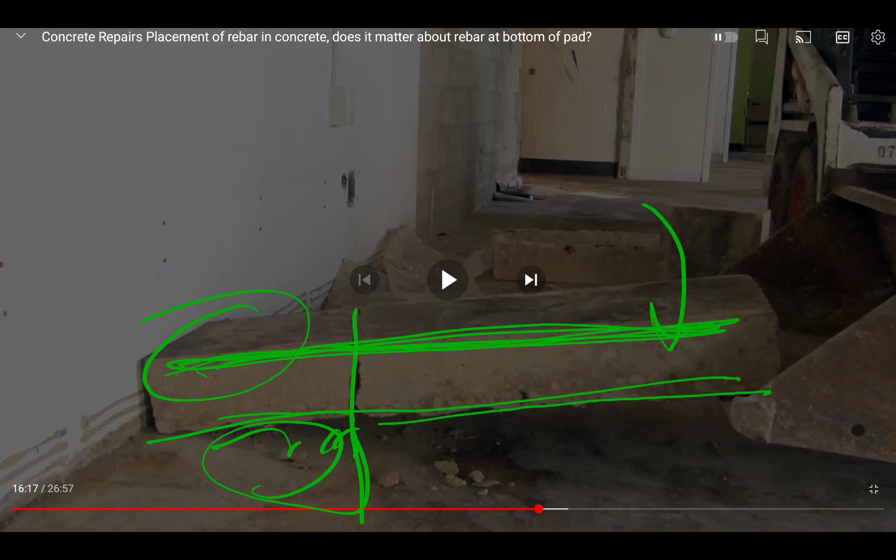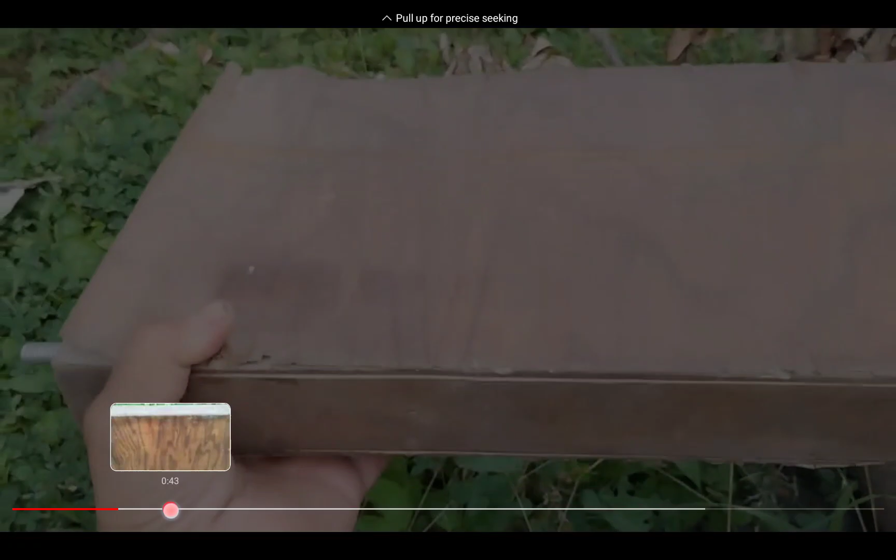Hope this is understandable. Go back to the video part where I show that piece of wood where you flip it over and you can see it. Imagine if it's flipped over the other side and you would understand it. Well, this is what it looks like in real life. And this is my sample. You can make this yourself to help you understand it. Just grab a piece of wood, put all thread through it, and then do this and flip it over upside down.

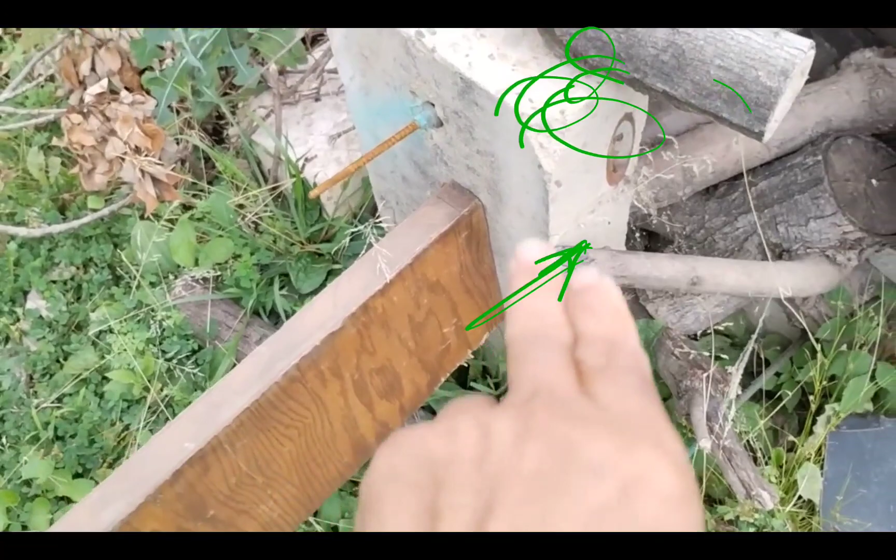And you'll see that, load it there to where my left hand is, loading down. It's going to be in tension at the top. But if I only had rebar at the bottom, it would just separate at the top right here. But since I have rebar there, it works, and it pushes counter forces here, right? All right, I hope this was helpful. But again, remember, if I turn it upside down, it's just going to fracture.

Let me get you a little different view. Foghorn outside, interesting. On this and pushing back on the wall. Pushing back on the wall as I load it down here. Now let's come up here and just create an elevator drop, a shear action, just going straight. I'm scrubbing down at the bottom there, as if no deflection would happen out here. It just happens to want to go straight down.

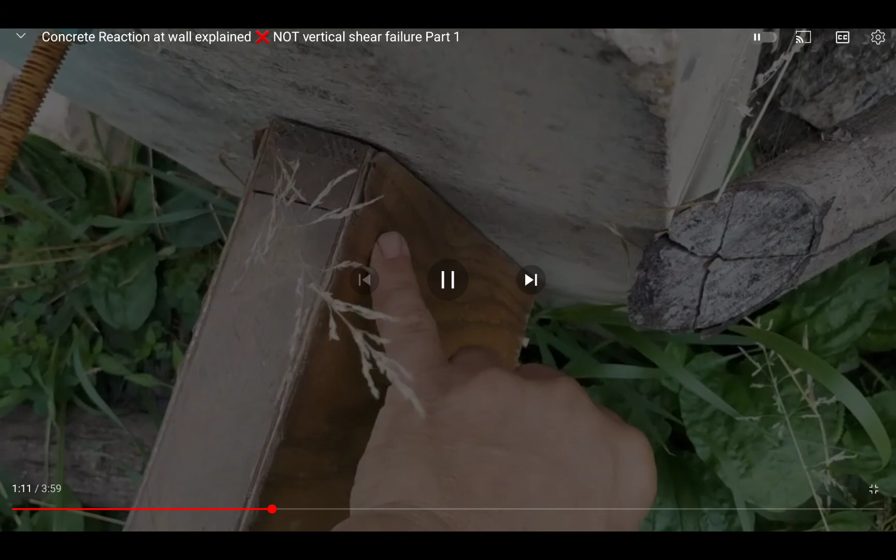the top. Imagine if the rebar was at the bottom only, and now put the force out here, such as a car slamming on the brakes, stopping, and you have no top reinforcement. It now wants to open this up, right? It would open it up, and in reality the stresses would probably look more like that. And between these two is where the fracture would probably develop, right there. It wouldn't be like this.

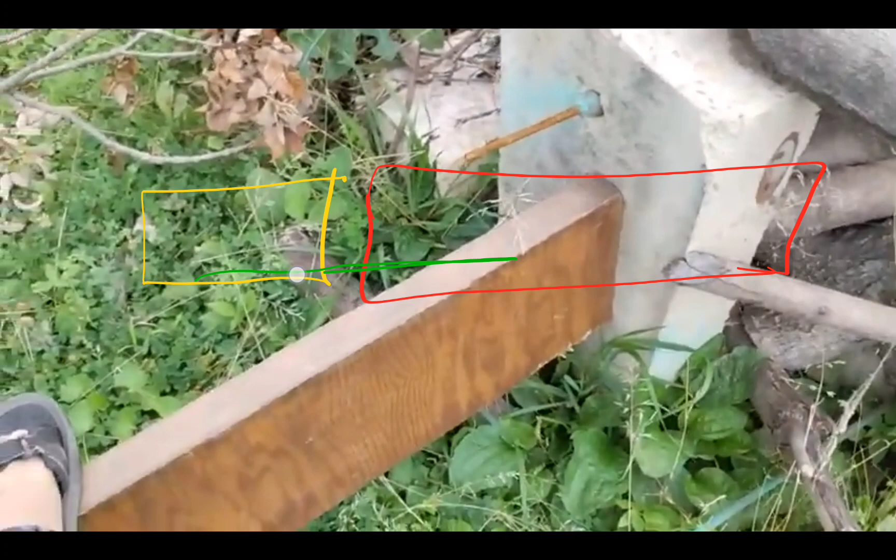Now it sure would be in Haas's case, since he does 2 different pads a lot. He does this. His reaction. Yep. So that was brilliant. Okay, so this is the edge, Haas, and here's your main pad, your car pad, and then let's do the reinforcement at the bottom. That was terrible color. And let's do the reinforcement at the bottom. You can see that loading here can easily cause this section to open up.

Additional wire mesh just laid across. Difficult to do, yes, so that's why you often see it doweled, epoxied in. And you can buy those tips, Haas. You can buy multiple tips on eBay and use one, 15-minute setting epoxy, fast setting epoxy. You drill all your holes, clean them out. You scale down your reinforcement to 1/4 inch, 3/8, 1/4 inch.

I don't know what vehicles they would be putting on, but I like it scaled down because I don't like the idea of water penetrating to that reinforcement, swelling up and then spalling off your beautiful work down here. So we want it to work, but we just want it not to separate.

Now, of course, if this soil is so tight under here, if you make it so tight that water wouldn't penetrate it, which is not possible, then no harm, no foul. It can't sink if it can't sink, right? It can't displace itself if it can't displace itself. But that's not possible. We know water will roll off this pad. We know water will get under there. We know the freeze-thaw cycle of the soil around it will affect this.

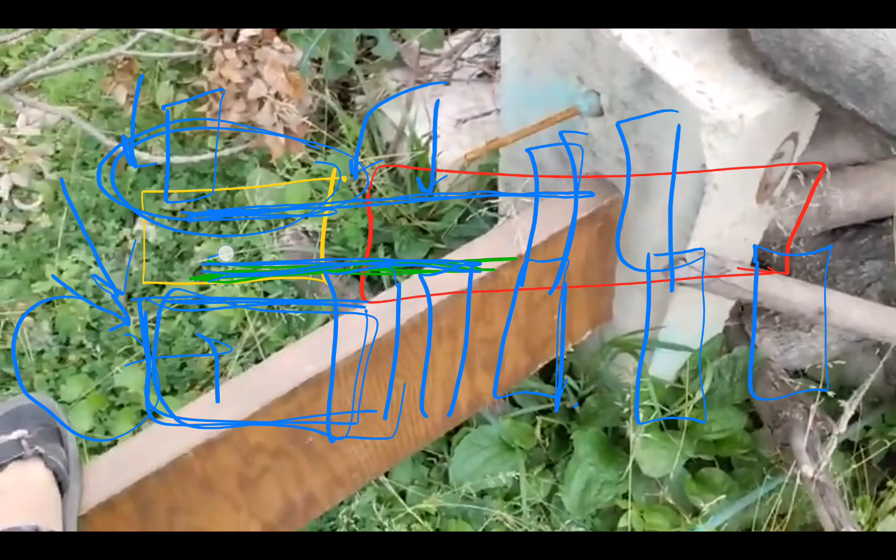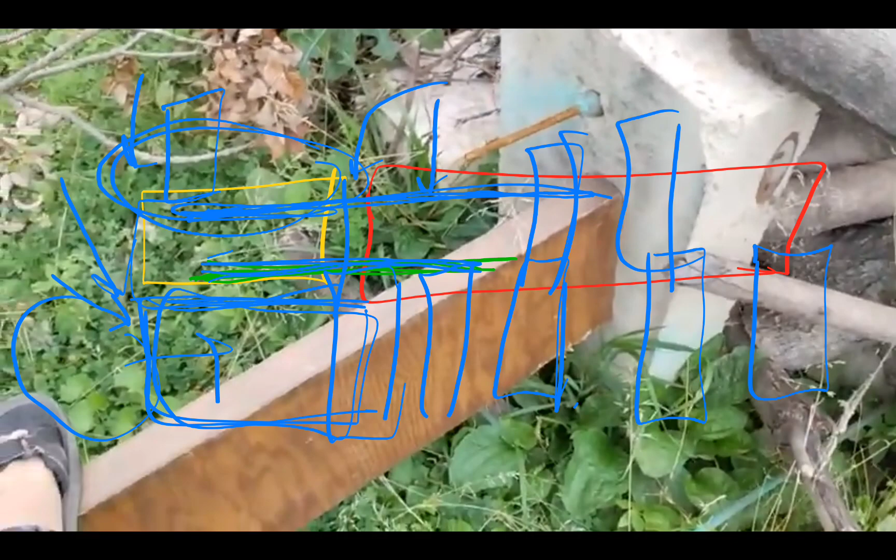Again, for my man who does mostly pads without the extra work there. So that's my man Grub. Let's give you a quick detail, Grub. So Grub just does pads only, pretty much. Grub, run your wire mesh all the way over. And then at the edge of your pads where cars are going, lay another mat. Lay a mat here. Lay 2 layers of mats.

And maybe come in, you can probably cut that wire mesh. Nah. Just lay the mat all the way down the top there. Love fiberglass. But this is top mesh and bottom mesh. And run your mesh all the way over. All the way over, it's no issue. Stuff's so easy to do. Overlap your mesh. Remember your pencil, the rule I told you about. Depending on where you're going to cut your rebar, where you're going to do your saw cuts, it does matter.